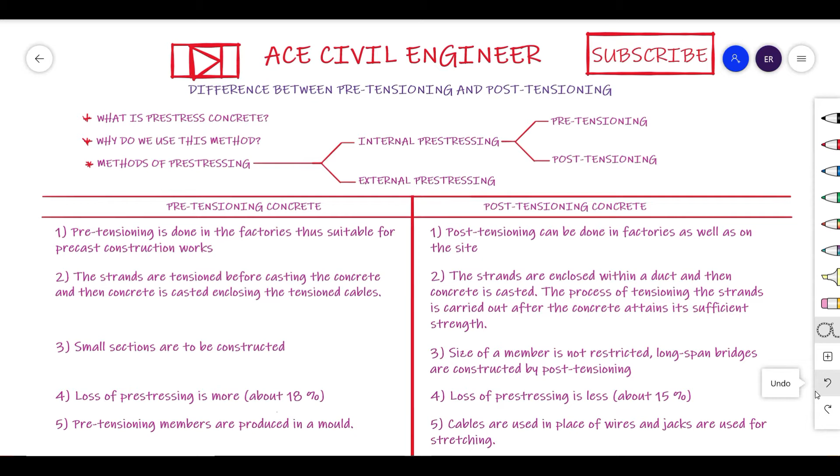So firstly, let us try to understand what exactly this pre-stress concrete means. Here it is, friends. Pre-stressed concrete is very much different from the conventional reinforced concrete structures, because we are going to apply some initial load which acts as a stress over

the pre-stressed member. So basically it is the concrete in which internal stresses of suitable magnitude and distribution are introduced so that the stresses resulting from external loads are counteracted to the desired amount. So let us try to clearly understand what I have told.

So first let us see, this is a normal beam, friends. This beam is subjected to some point load, because of which it is going to bend in this manner, which I have shown you in the next step. So this green color one is the deflected shape or the elastic curve of the beam.

Later, to the same beam I have removed the load and I tried to do some pre-stressing by providing some pre-tension or post-tension or some external pre-stressing within this member. So I tried to pull the rebars, or the tendons which are acting upon it, and later I tried to release it.

Then, as we have applied some tension load here and here, this tensile stress will try to induce some compressive force into this concrete member. Because these steel tendons, see, tendons are basically like this, friends. They are made of a group of strands, so that is called tendons. You can see it in the figure here.

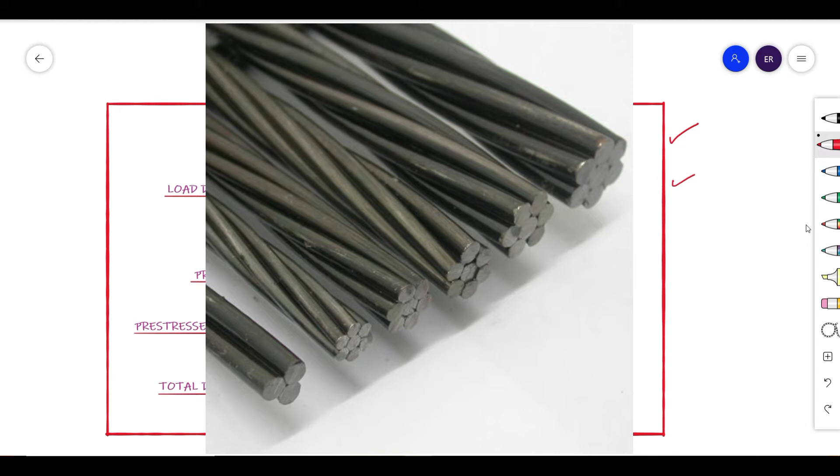So when these tendons are released, as per their elastic nature, these tendons will try to come back to their original position. But as the concrete is hard, due to some bonding stress or due to some anchorage which is provided, it tries to apply some axial load.

That axial load, which I have shown in the fourth one, will try to act, because of which this beam is going to deflect in the upward direction, because this is not a concentric load, friends. We have applied it somewhere below the neutral axis, that is in the tension zone of the concrete.

So this is initially bent in the upward direction. This is going to be counteracted by the outward loads. See, this outward load means some external load which is acting on the member here.

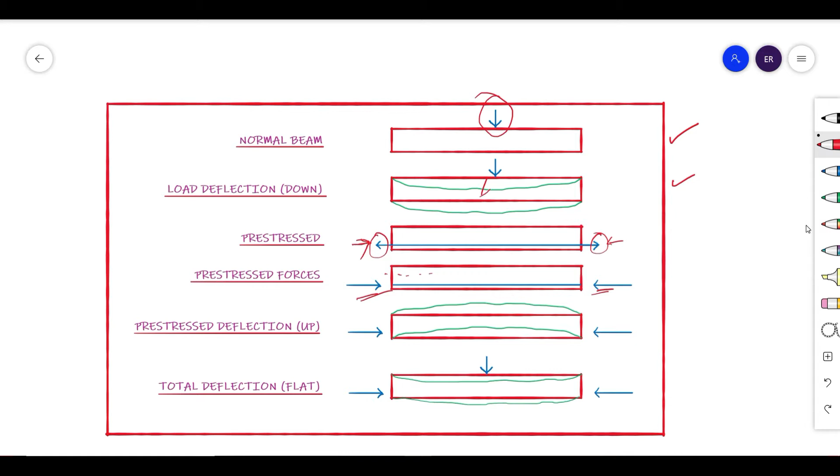So, friends, initially we had some deflection of delta here, consider it as delta 1, and later this deflection is something around delta 2. Now I can say delta 2 is much less than delta 1. So this is how we are going to get some advantage.

See, if you see the concept here, when there is no pre-stress, I am talking about this figure, you will see some cracks being generated. Because of these cracks, the complete ability of the concrete or the steel, these members or materials, is not properly used.

So because of these cracks, the stiffness of the complete concrete gets decreased, and because of this the load carrying capacity also gets decreased. Whereas here, if you see, initially you will be getting some cracks like this.

Once the load is applied, these cracks are going to be closed up, because this complete area comes into the compression zone, and later you will see some very small cracks here. Those cracks will not be that significant or that heavy that this structure can be called unserviceable. So this is the major advantage of using pre-stress, friends.

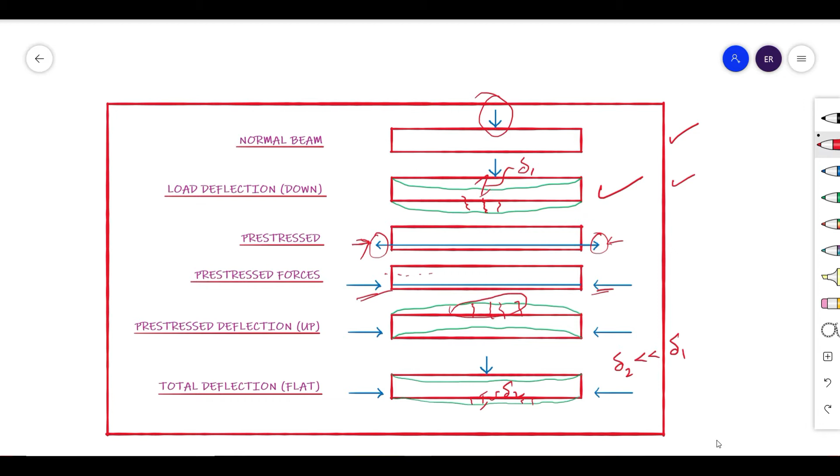If you see mostly in bridges, or else where there is a long span where you can expect some huge amount of bending moments, or else where you expect some huge amount of deflection, in such cases this is very much useful to utilize. So let us see what are the drawbacks which have led to come up with this new concept of concreting. So those are something like this, friends. See, we do use this pre-stress method because there are basically some catches of reinforced cement concrete. So those are something like this.

The first one is cracking in tensile region as concrete is weak in tension. See, as I have already mentioned, if you notice this location, here there are some major cracks. This is leading to some weakening in tension because the concrete is not going to take part in any tensile load as per limit state design. So that is the reason why we go with the pre-stress concrete. And the second one is the excessive deflection.

Yes, excessive deflection, friends. Here, once these cracks are formed, and if these cracks are going to propagate deeper into the depth of the beam, then what happens? The stiffness is definitely going to reduce, because stiffness is nothing but load per unit deflection. I mean, when the deflection is increasing, obviously the stiffness is going to decrease drastically.

And the third one is, because of this excessive cracking, that can create some durability problems. That is nothing but the serviceability problems. If the lifespan of a particular structure is around 50 years, then it would definitely be unserviceable in 30 years or 25 years. So this is one among the reasons which has led to develop this pre-stress concrete method.

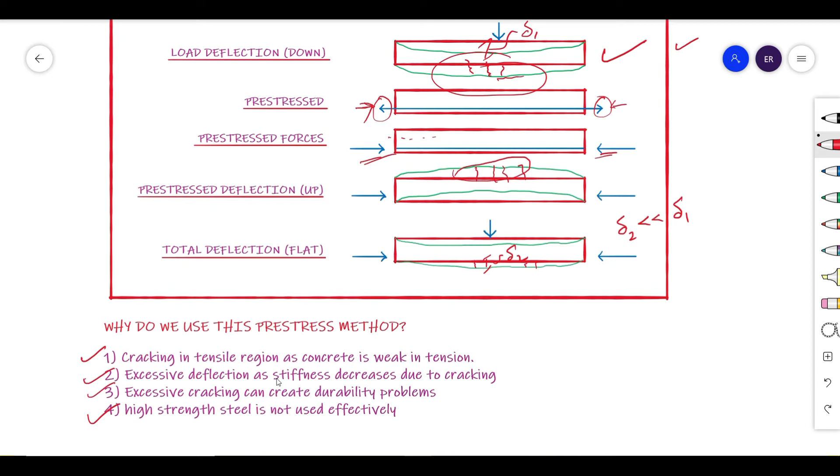We are going to make use of higher grade, because in pre-stressed concrete we are going to make use of the complete strength of the material. Mostly it is something around 900 to 1400 MPa. That is the maximum stress which we generally use for steel instead of 500 or 415. So the third one, friends, I told you that we are going to discuss the methods of pre-stressing. So let us get into that. So here we have covered what pre-stress concrete means, and why do we use this method, and next coming to methods of pre-stressing, friends.

So the basic methods of pre-stressing are internal pre-stressing and external pre-stressing. So what is internal pre-stressing? Here, friends, internal pre-stressing means the bars or the tendons which are within the concrete are going to be subjected to some initial tensile stress, which in turn leads to some internal stress within the concrete member. Whereas external pre-stressing, friends, would be something like this. If you see some member here, in that member we provide some different supporting arrangement, such that

these are some hydraulic jacks. These hydraulic jacks will try to provide some external pressure, a compressive load, not stress, and that will be acting as an initial pre-stress. But this is not much utilized because the cost is very high, and the accuracy of maintaining this load is very much less. That's why most of the times we do not prefer to go for external pre-stressing.

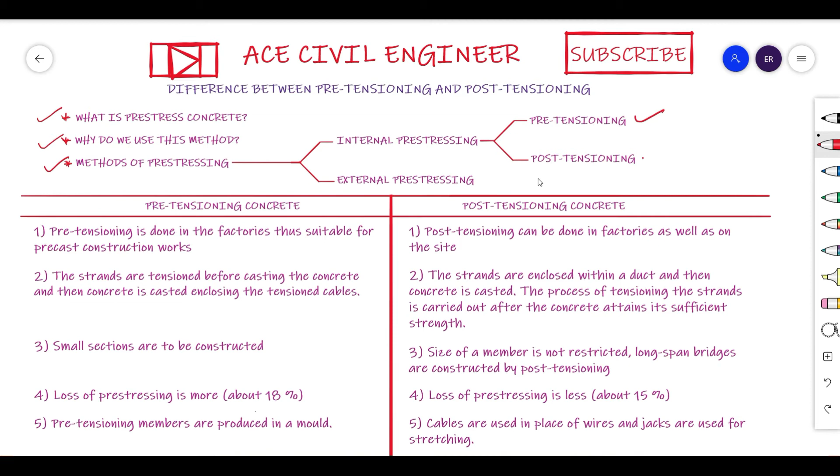Whereas in internal pre-stressing, friends, again there are two methods. One is pre-tensioning, the other one is post-tensioning. So let us see in a better way. So here it is, friends.

So I think from this picture you can understand very clearly what exactly this pre-tensioning and post-tensioning means. Even then I'll try to make you understand from this picture itself, because it explains very clearly, including the labels. In the case of pre-tensioning, friends, what happens before laying the concrete?

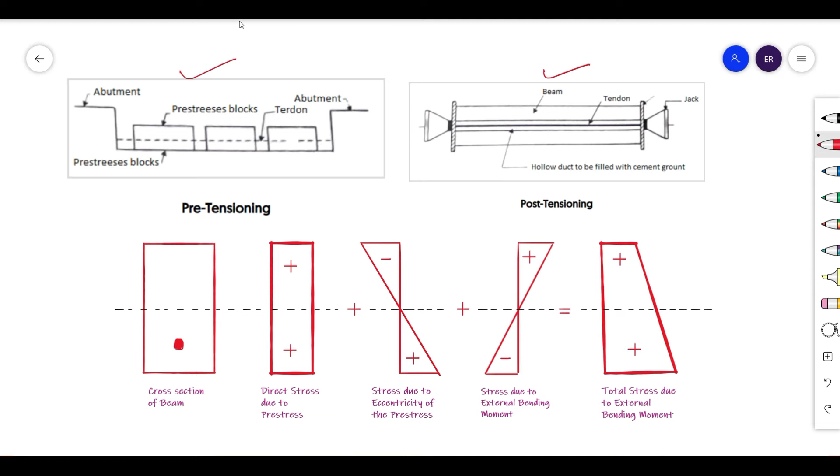The molds are properly arranged, and within that, this dotted line you are seeing here is a steel rebar or steel tendons which are provided like this, and they are pulled and tied to an abutment-like structure. So this will put some tensile stress within this bar, and it holds it in position. Later they will cast these concrete members.

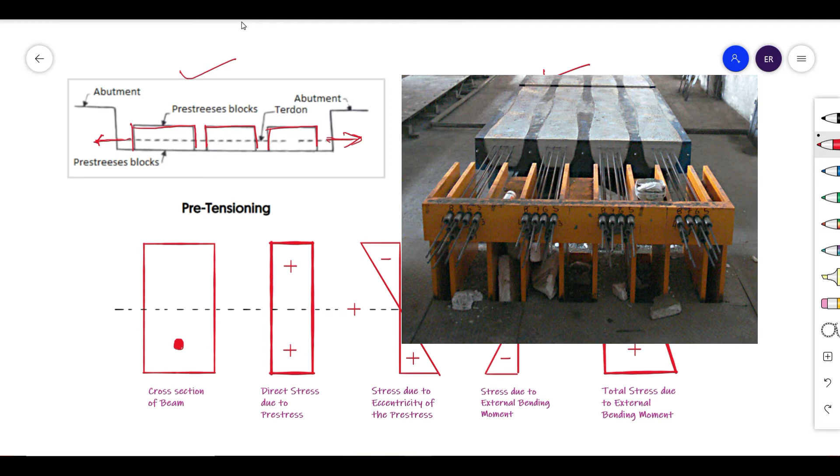Okay, so these concrete members are acting as precasting or pre-stressing members. If you see some railway projects, under every rail you do see some sleepers. All these sleepers are basically nothing but pre-tensioning sleepers, or we call them precast sleepers as well.

And next, coming to post-tensioning, friends, in post-tensioning we do concreting, but before doing the concreting, we'll put this rebar and give some coating over this rebar, or else we provide some duct, something like this, friend. This is called sheathing. So this sheathing is something like a duct. You can see it in this picture like this.

This is placed in position, and our rebar or tendon is put in its position, and later they will fill it with concrete, friends. So this complete region is filled with concrete, but there is no direct contact between concrete and this tendon, because you will be having some air space or clear space within the duct.

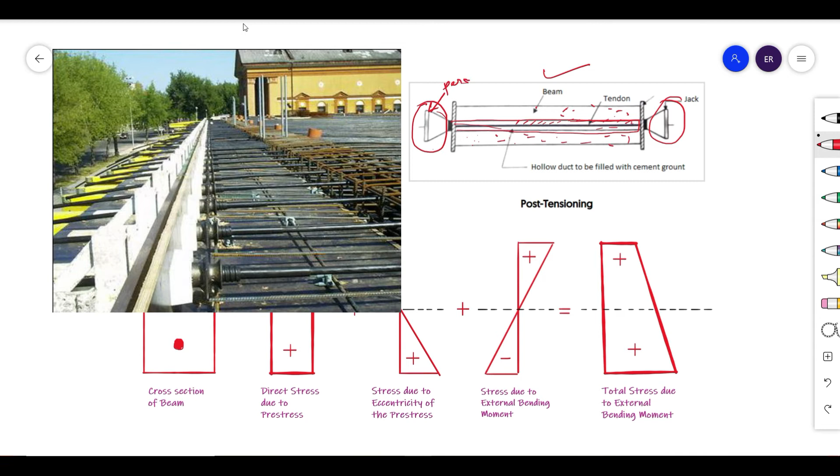So after the concrete gets hardened, with this anchoring equipment or hydraulic jacks, they will provide some tensile stress in this tendon, and later these hydraulic jacks are removed and provided with permanent jacks. So this becomes permanent, and these permanent jacks will hold it in position by bearing at this member. So this bearing area they will utilize,

and within this bearing area they will create some tensile stress or compressive force. See, friends, I am saying tensile stress, which gives you compression force, whereas compressive stress gives you tension force. Please don't get confused in this, you need to understand. Okay, so this is how a concrete member is subjected to post-tensioning. This is how it acts.

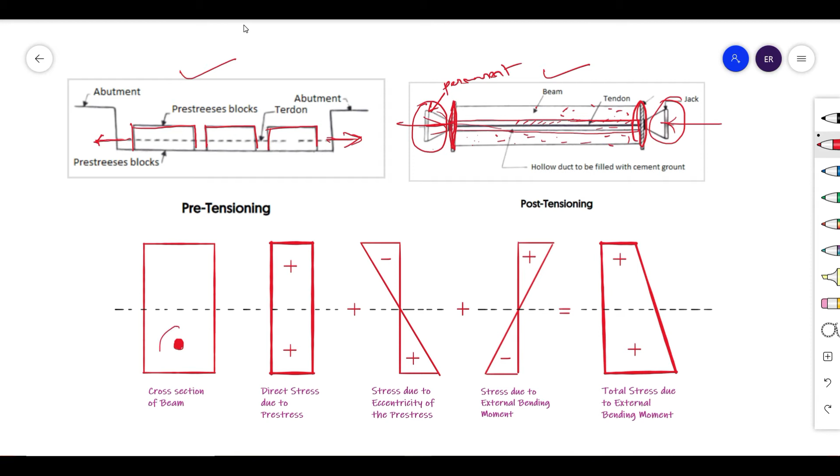So in a better way you will understand what pre-stress does. See, I am considering a cross section of a beam where I am providing a tendon here. After providing some tensile stress in this tendon, you will see some direct stress due to pre-stress, because suppose this load is P, this will become P by A, and due to the eccentricity provided here some stress will be generated, and because of that some bending moment will be generated. That will be something around M by Z.

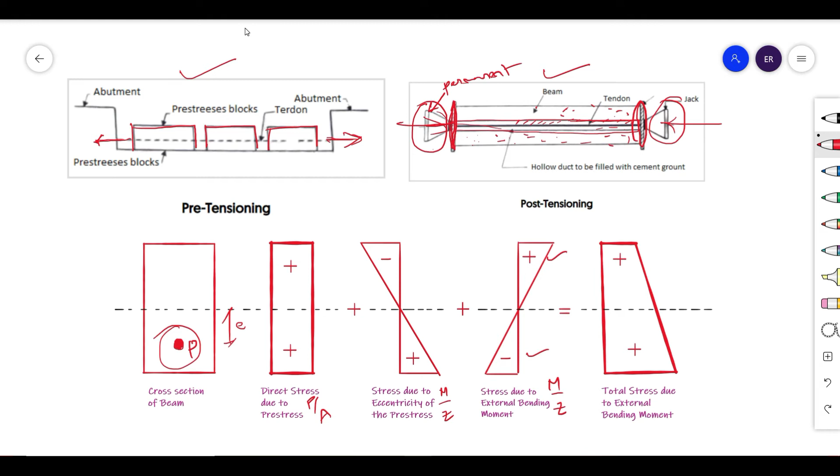And again this is due to external loads. When you apply some external load on a beam, you see tension at the bottom and compression at the top. That's why here it is plus and this is negative. This is also M by Z. So overall, if you sum up all these three, 1, 2 and 3, you will see something like this, friends.

So you are not going to see any neutral axis falling in between. That means the complete concrete member is in compression. See, plus and plus. So the complete member is acting as an axial member, because of which you can utilize the strength of concrete as well as the total strength of steel all at once. That is a very good idea of utilizing the concrete strength, just by avoiding tension within the concrete. That is the only concept here.

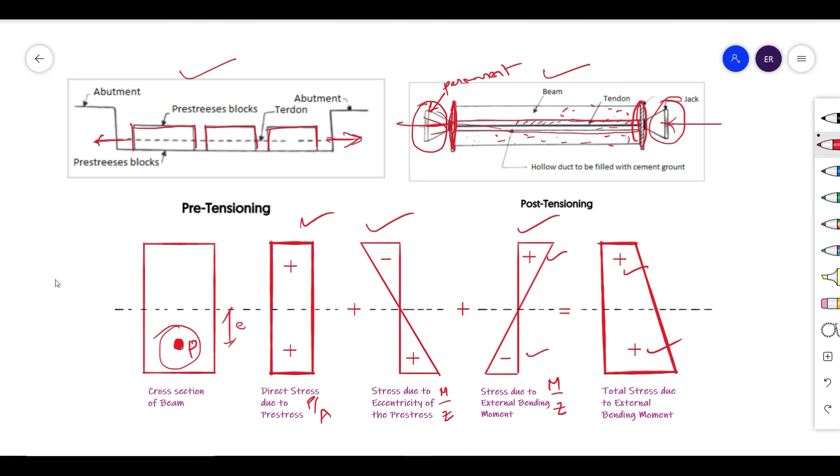So let us understand the differences between pre-tensioning and post-tensioning, and we'll wind up this video, friends. Here are some of the differences which I have jotted out. The left side points are all for pre-tensioning and the right side points are all for post-tensioning. The first one is, pre-tensioning is basically done in factories. Thus it is very much suitable for precast construction.

As I have already mentioned, while casting they will make some molds, pull the bars and put them in position using some abutments, and then they will pour the concrete, the concrete gets hardened, and then they will cut off the rebar or the tendons.

So then this tensile stress will be acting on it. Now coming to post-tensioning, friends, post-tensioning can be done in factories as well as at the site. So you have the flexibility of doing it either at the site or at the factory.

Now coming to the second point, friends, these strands are tensioned before casting the concrete and later they are cut off. Whereas in post-tensioning, the strands are enclosed within a duct and then the concrete is cast. The process of tensioning the strands is carried out after the concrete gets hardened. So once it reaches its strength, only then will we apply the hydraulic jack forces.

Pre-tensioning is basically used for small sections in construction, whereas post-tensioning is used for large size members, as I mentioned, like for long span bridges etc.

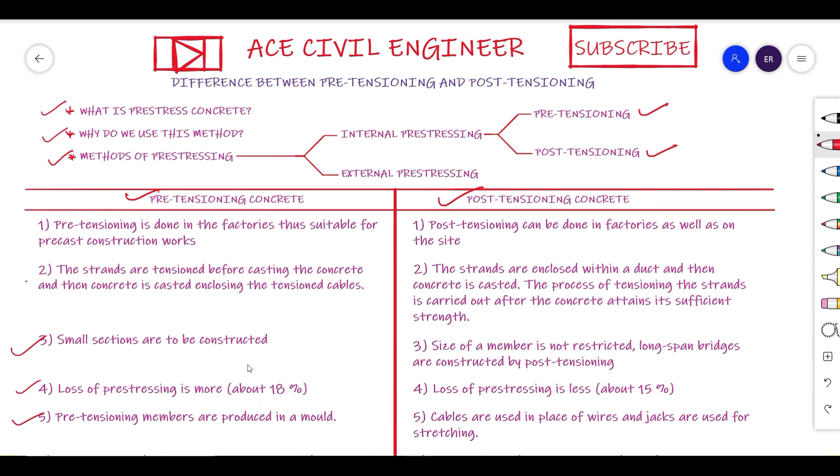Next, coming to the sixth point. In this method, the concrete is pre-stressed with the tendons before it is placed in position. In this method, pre-stressing is done after the concrete attains sufficient strength. This is clearly shown in point 2 as well. This method is developed due to the bonding between the concrete and steel tendons. This is very important, friends.

In pre-tensioning, the bond stress between the steel tendon and the concrete plays a crucial role in transferring the compression forces into the concrete. Whereas post-tensioning transfers the force using the bearing area. Based on that bearing area, we see compression force acting within the concrete member.

Pre-tensioning is preferred when the structural element is small and easy to transport, whereas in post-tensioning, friends, small members are all taken to a common place and held in position, and later within the duct they put a bar and then do the anchorages here. So this can be used for heavy or large span structures, large structures.